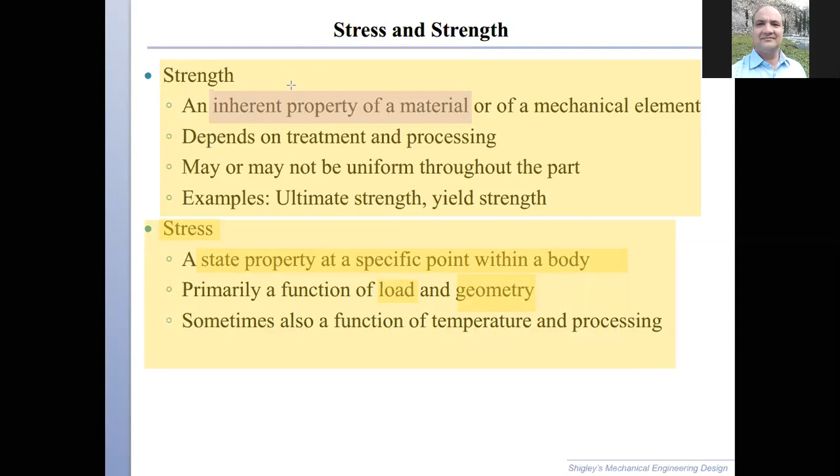When we are designing a component, we need both of these: we keep into account its strength, and we also keep into account the stresses that are acting on that body, so that we can compare these two, especially the stress with whatever material we choose for the design, so that it has enough strength to cope with the stresses acting on that body. Theek hai ji?

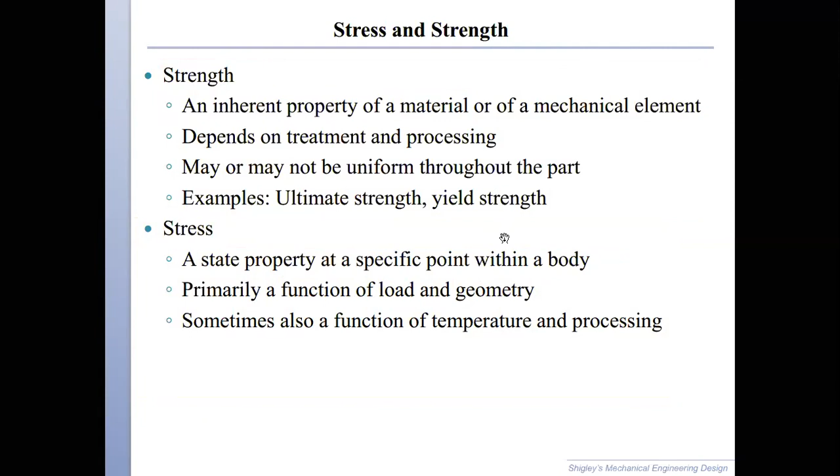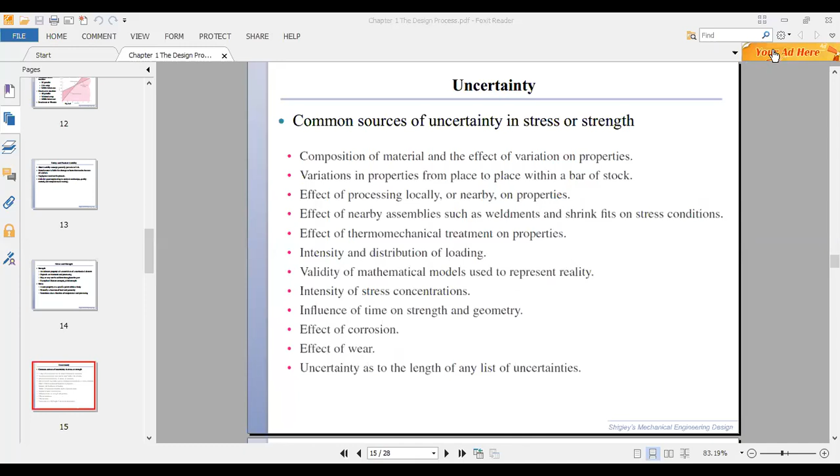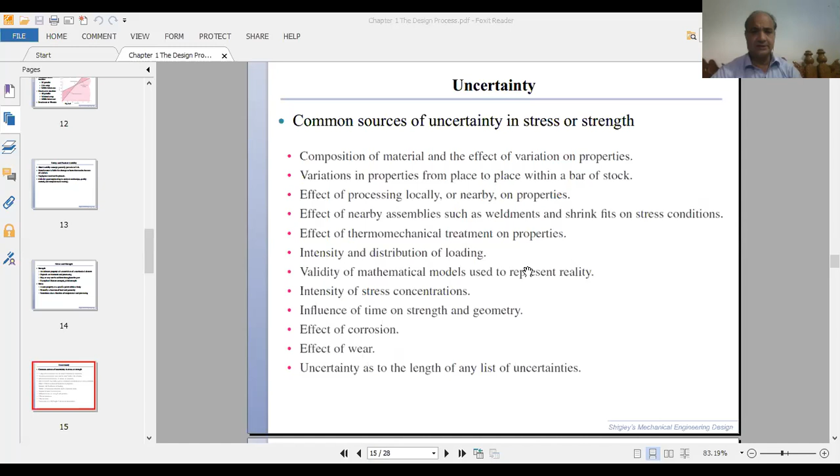Accha, one thing is that when we are talking about the strength of a material, there are some uncertainties in the strength of a material. Theek hai ji? For example, the composition of a material, variation in properties of material, and there might be some processes happening nearby, and the effect of those on the properties of a material.

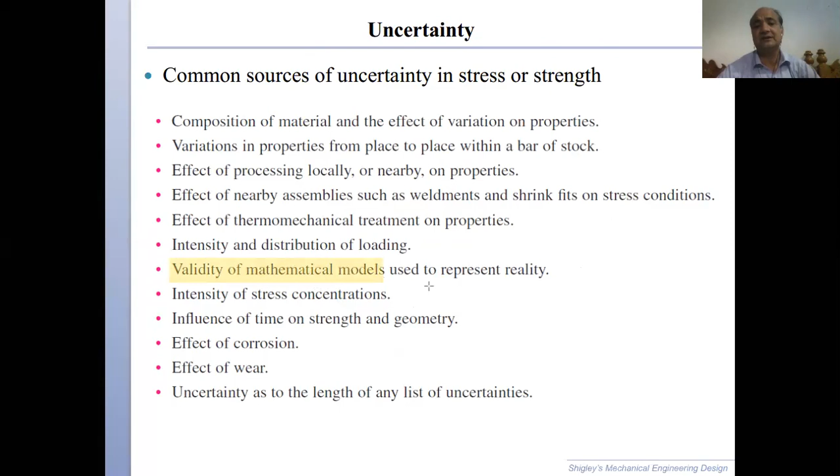Again, as you were saying, the validity of mathematical models used in representing the reality. We debated how you know that your mathematical model is exactly representing the reality. So we do make sure of that, but sometimes we have to simplify things and make assumptions. Assumptions are things you take for granted, and they do make sense. You cannot call a straight line a circle, but you can call a circle with infinite diameter a straight line.

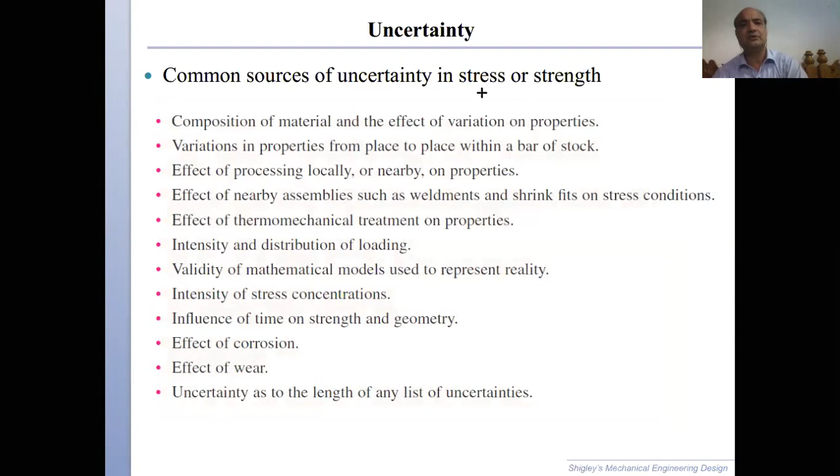So there are some assumptions, and in order to cope with these uncertainties, we would introduce something in our design. For that we discussed a factor we call the design factor, n_d, which is mathematically equal to loss-of-function parameter over maximum allowable parameter. For example, if the parameter is load, n_d equals loss-of-function load over maximum allowable load. Okay.

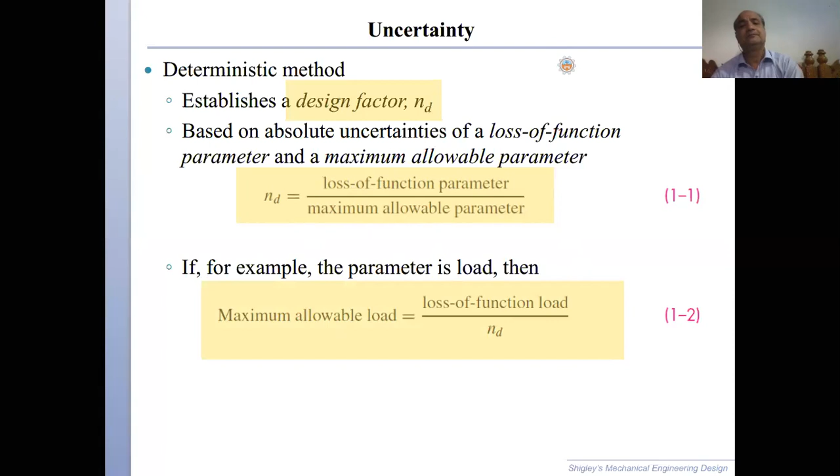We also did an example with uncertainty about the maximum load on the structure and the load causing failure, plus minus 20% and plus minus 15%. You can take away this uncertainty by calculating the design factor, which turns out to be 1.4. Using it, your maximum allowable load reduces to 7.1 instead of the nominal load of 10 kilonewton. Okay.

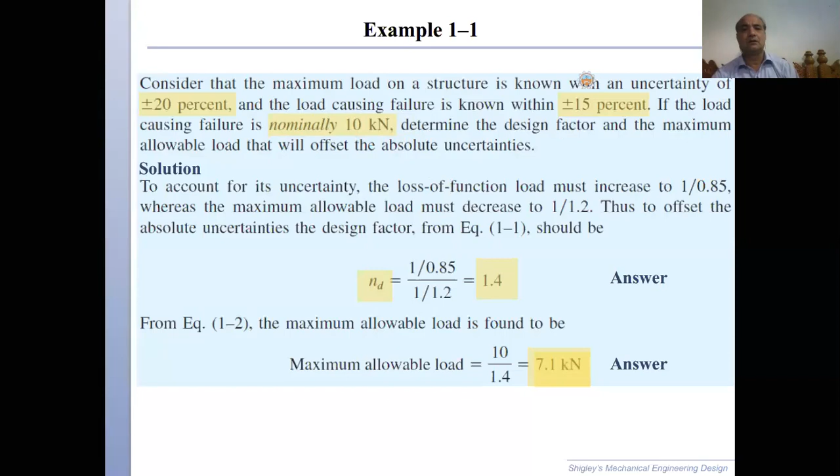In this design factor, there is a factor of safety that you already knew about, and the formula for the factor of safety and the design factor is the same. Mathematically, they should be the same. The only difference between the factor of safety and the design factor is that we start with the design factor, and then when we are doing calculations, we might be rounding things.

For example, let's say you are performing a calculation and the diameter of a shaft comes out to be 1.67 inches. So what do you do with this? You round it, right? You round it to 1.7. And if you recall, we also said that maybe this 1.7 inches diameter is not available in standard sizes. So what would we do?

We would go further. As we said, in table A17 there are preferred sizes. Let's just assume that 1.7 is not available and the only available diameter after this is 1.8, so we would use 1.8. Now, since the diameter was calculated as 1.67 but we are using a different diameter, it is going to reduce the stress on the component. The area is more now, and as stress is a function of load and geometry, we have altered the geometry.

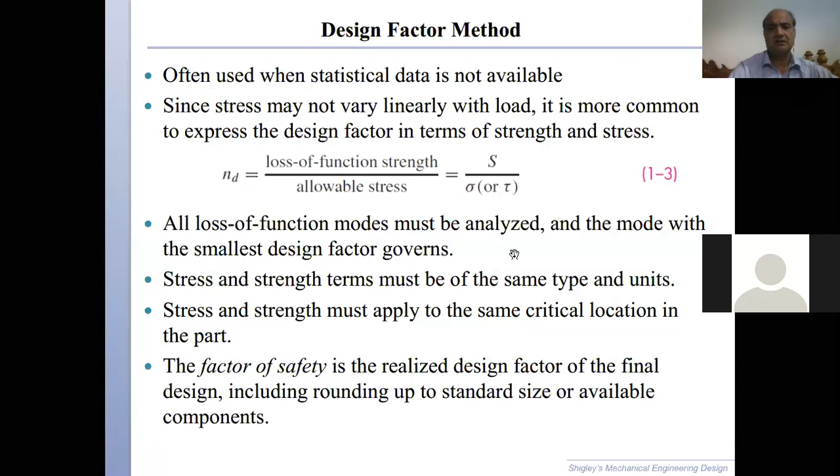Let's say that we have a solid circular rod to make, with a design using a material that has 170 MPa strength. So the strength is 170 MPa, with a design factor of 2.5. Find the minimum diameter of the rod. So you have to determine this.

We already know that stress is equal to 16M over pi d cubed. And we also know that nd is equal to S over sigma. So we can equate these two and substitute the values. The only unknown is the diameter d. So we can find d, and that comes out to be 21.11 millimeters. This is the minimum diameter that we should have with a design factor of 2.5.

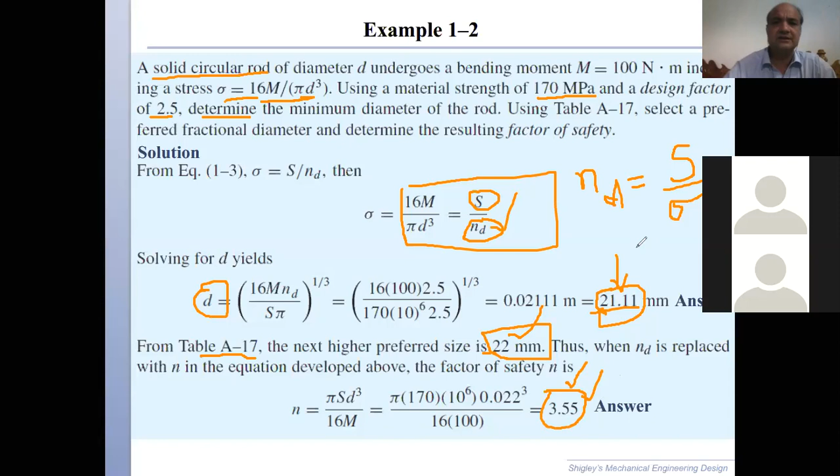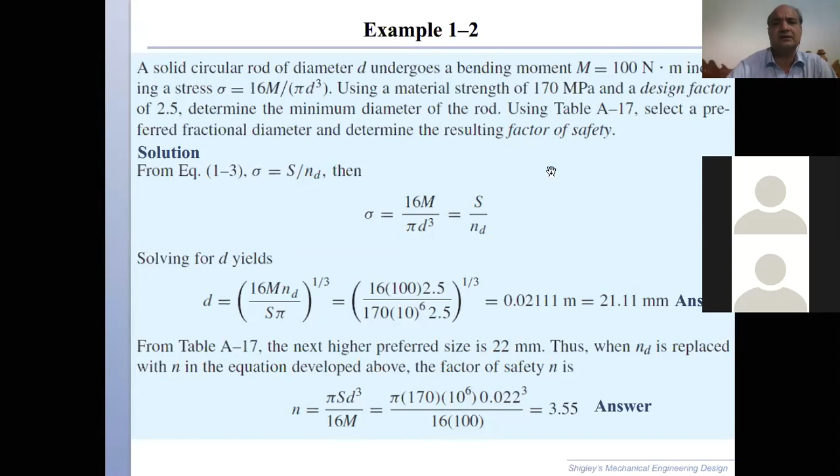So now going further, should we take a break? It's just about over.